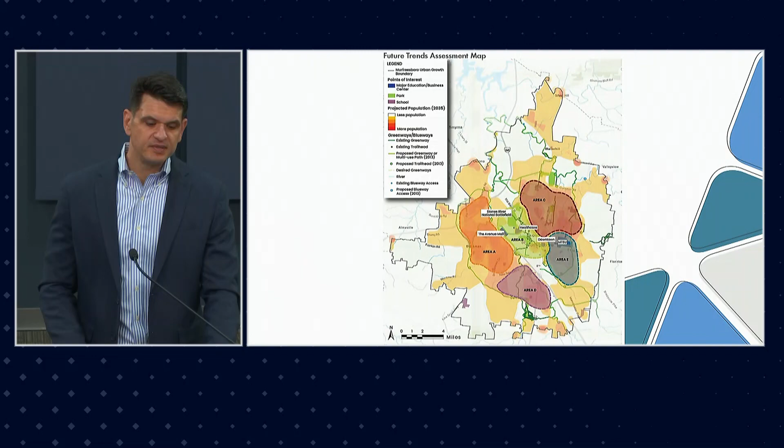So we took stock of existing conditions. We said, okay, this is what we want the plan to do, and then our next step was to take a look into the future and see where we're going and how we can make recommendations to support that. And that's what this map shows.

It's sort of a summary map. We divided the city up into the different areas that you can see there, and we looked at where the important things we want to connect are, parks and schools, but we also wanted to look at where population is growing. We want to get ahead of that and maybe start to build out a greenway system around that to help complement that growth. That was one of the important things we did with this map.

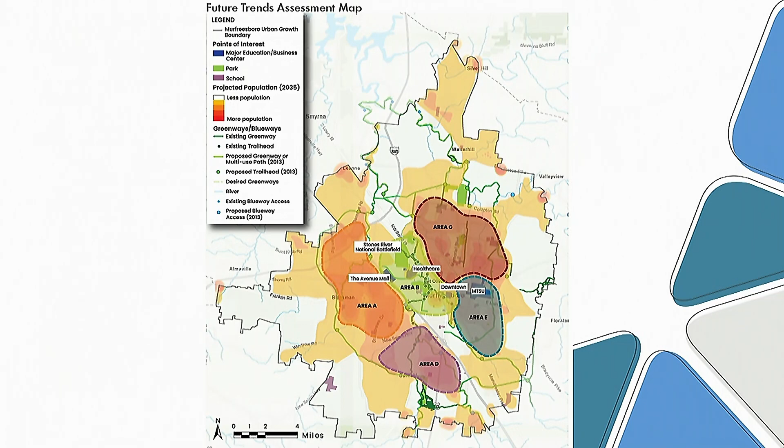And then we sort of played connect the dots, if you will, and started to draw connections. So what are some areas within each of those areas that we need to connect? And then how can we better connect those areas to each other? So you see a couple of different colored lines there. That reddish darker color are new connections, and then the yellow are some existing connections.

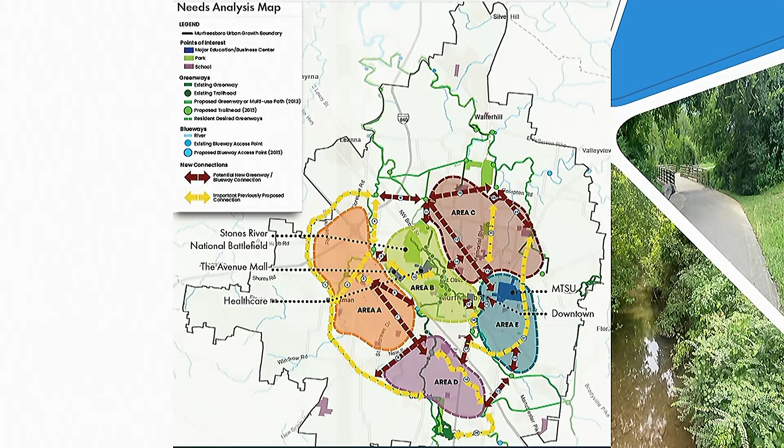So those are things that have already been proposed either in the previous plan or from the community, and we're simply calling that out and saying, yeah, those are things that you've already suggested, and they're still valid. And then the darker ones are some of the new connections that we've seen from changes, and here are some of the new connections that we think you should make.

We also asked the public to tell us, and so that's what this map is. It's called a wiki map, and it was online, and people could draw lines on the map online to tell us where they wanted to go. And you see there's a lot of overlap between the map we just showed you and this map, and that was just simply confirming some of the areas that people told us they wanted to go. We needed to make sure to make those connections.

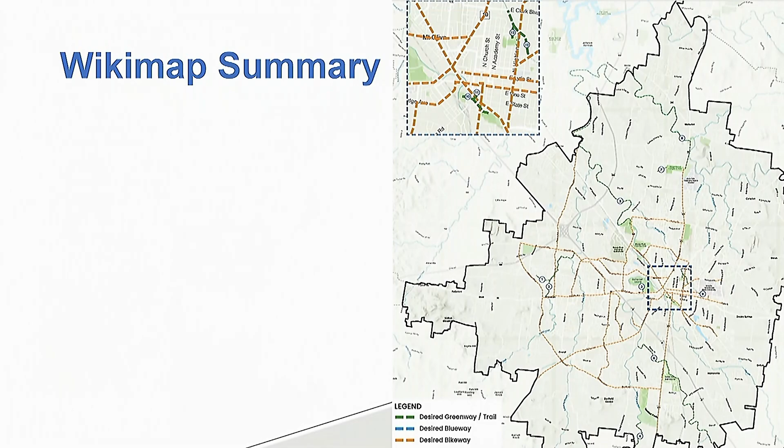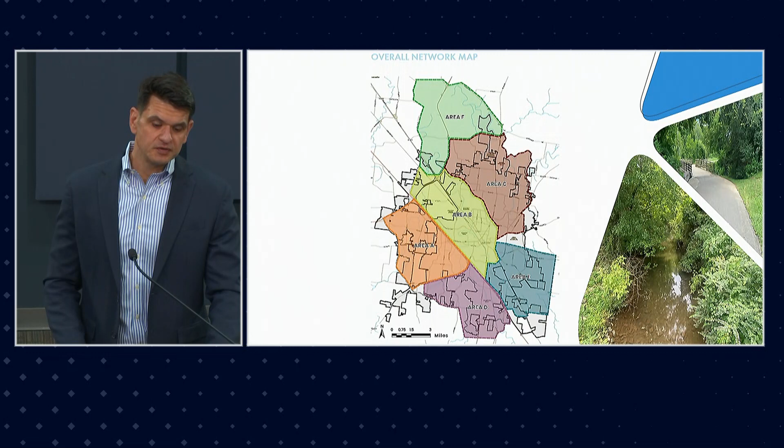So this is a little more refined version of that map that I just showed you, and this is what we built our plan around. So we identified 6 areas around the city, and within each area, we developed recommendations. I'm not going to go through every project, so don't worry. I think there are a total of 25 recommendations that are spread all throughout the city.

This is Area A, so it's just on the other side of where we are right now, on the other side of the interstate. And it's one of the faster growing areas in the city. And you can see that the recommendations generally would fall into, I guess you could say, 3 different categories.

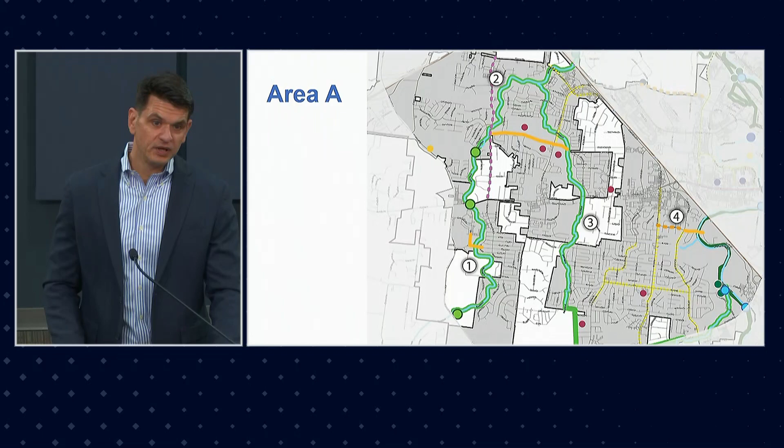One type of recommendation would be along an existing river that you can see there. So we call those blueways. They run along the river. Others run parallel to existing facilities, so existing streets, and those are typically in the form of a side path or side trail. And then others are new connections where we find either an abandoned right-of-way easement or something else that we could design a trail connection along.

And then the facilities, depending on how much right-of-way we have and where it's located, it could be sort of a standalone facility, or it could be more built alongside an existing road. It really sort of depended. But we had to go into each one and sort of make a judgment call.

So that map that I showed you earlier that had all the arrows on the map, this map tries to put those arrows into practice by identifying feasible connections within each area to make that happen. So this is Area A. The numbers on the map correspond to specific projects, so you'll see a table of projects in your report, and they provide descriptions on what each one of those are and how much each one we think will cost. And we'll show you that table in just a minute.

So this includes where we are right now in downtown, and you've got a lot of your existing greenway and trail facilities here already. So in this area, we focused more on making those connections, so connecting new areas to those existing facilities. This is Area C, a little bit north of there.

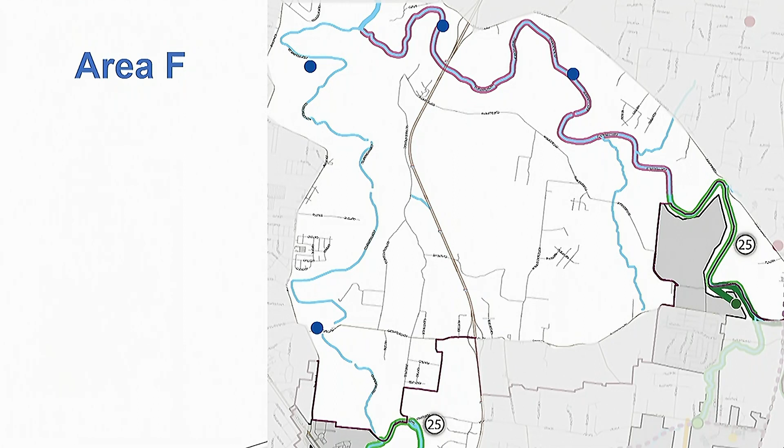This is Area E, down by MTSU and south of there, and then Area F. Each one had its own specific set of recommendations, and each has a description of what it is, what it's connecting, where it's going from, where it's going to, and what the facility type is.

So we developed the recommendations, and back in the fall we were here in the lobby and had a public meeting, asking people to give us their thoughts and feedback on those trails. In a lot of cases, people said, yes, that's exactly what we want, good job. This is what's most important to us, or hey, have you thought about making this connection?

So we made a few tweaks based on what we heard from the public. The other thing we tried to do — it probably won't surprise you that the city does not have unlimited funds. So we've got to prioritize our projects, because it's going to take a while to get them funded, designed, and built. We have to figure out what projects we want to pursue first.

So the way that we did it is we used a very data-driven approach to identify the trails that provided the most value to the community.

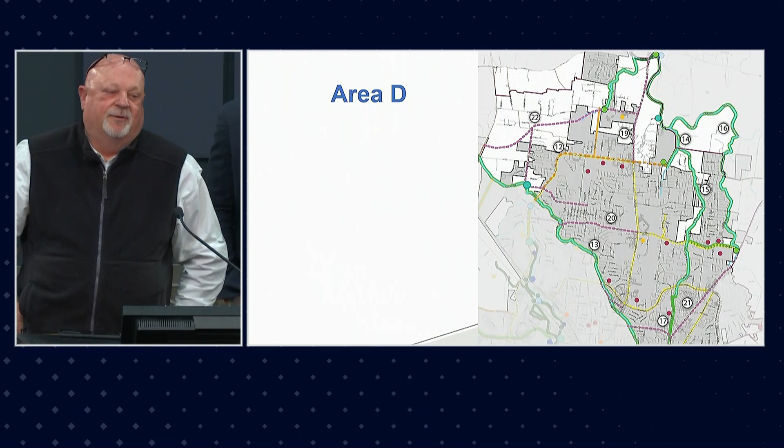Something we talk about with these plans is, when we vote to approve these plans, it's plans in principle, what we think would work, right? So we're not committing the city to funding anything, it's just what the plan would look like. And what we've discussed throughout this process is that opportunity a lot of times supersedes prioritization when it comes to these charts. We don't have to go down by that list, but it might be a funding mechanism that we can actually implement a section that might not be high on our priority list, but serves us best long-term.

Any other questions? I have one more quick thing. I think it is very important, as you stressed, to have a plan as we go forward and try to get funding from the state and federal governments, because that's exactly what they look for. So this hopefully will help us make those applications.

When we look at funding, there's lots of opportunities for a greenway. Our greenways, if you stretch it out, it's a linear park, and it's the most popular amenity that we have, the most used. So we're constantly looking at ways to expand it and increase opportunity. I think with the help of Kent, who's been doing this for a long time with us, looking for opportunity, and still the advocacy of former Congressman Bart Gordon looking for opportunities, it's still a funding mechanism. So this type of tool helps us get those implemented and funded in unique ways, and helps us have a really unique greenway system in Murfreesboro.

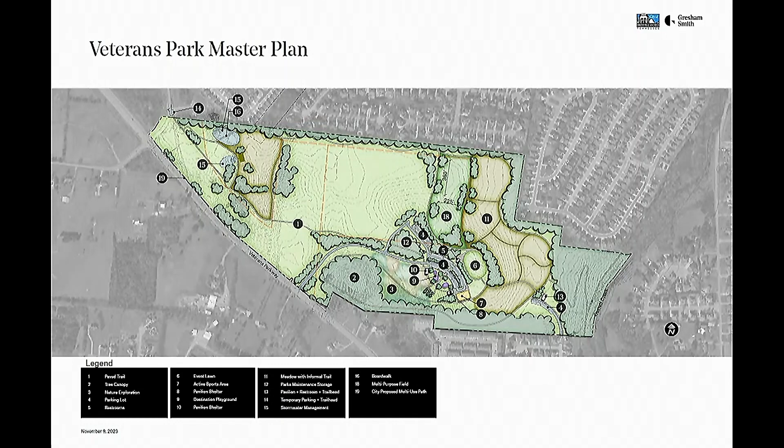We are finalizing right now our cost estimate, updating from the master planning effort, taking into consideration changes made during schematic design and some of the detailed development that came into it. We feel like we're right on target for where we were at master plan, so that's good news. And again, kudos to Nate and his team for not adding too much stuff in that would get us out of whack and unable to deliver on what we promised.

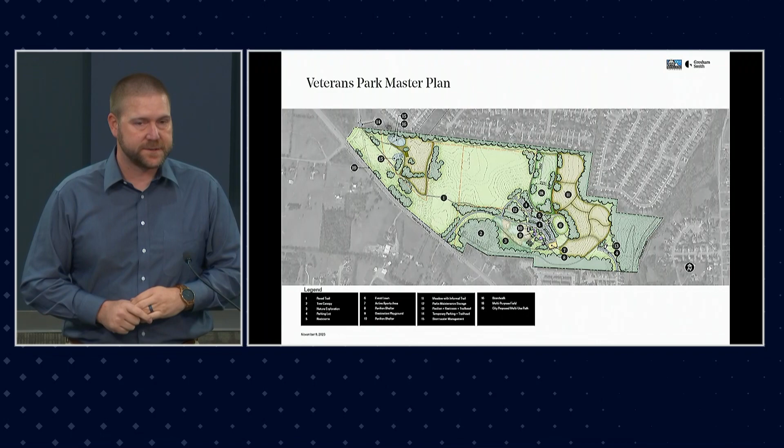So what I want to do now is walk through some of the plans. This is just a few selections from the set that was delivered to the city, and we'll start to see some of the detail that has been developed. This is an overall exhibit, just orienting you to where things are within the park. You can see the dense area, what we consider the heart of the park, where you'll see event lawn space, the destination playground, parking—a lot of those components show up there. So this is just your high-level overview.

Starting at our park entrance, trying to think about what the arrival sequence feels like when you come to the park—what do you see first, what's that design aesthetic, the language we want to establish as soon as we arrive. The intent for this park is to be more passive, right? We're trying to get a little bit more back to nature, give people a respite, get away from the city, get with nature. So we want to implement that as soon as you come into the park.

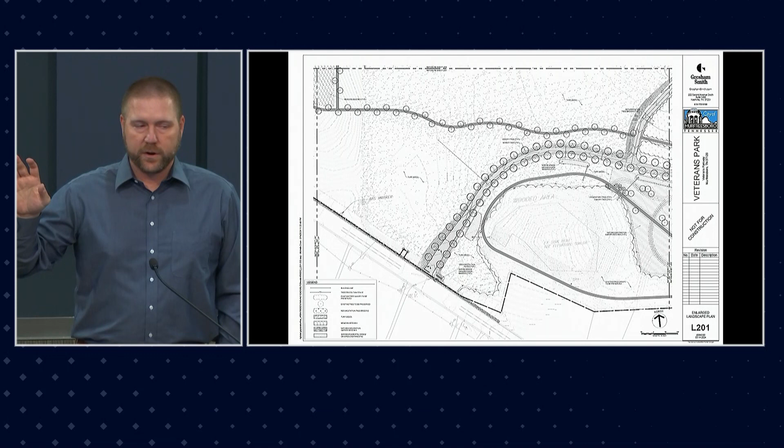So we're continuing to revise and modify this. How do we position sidewalks? How far away from the travel path should it be so that you get that more passive, recreational feel, a little more pastoral in the way it's designed. So this is where you see the entrance road with street trees lining it, and some of our trail network showing up here.

Part of the scope involved here is a multi-use path along Veterans Parkway. We have a work session scheduled tomorrow with Nate and his team to really flesh out more of these details and understand how we want that multi-use path along Veterans to look. So you'll see it here depicted right up on the right-of-way. We're not sure that's the right way to do it—we're certainly open to a bit more undulation, curvilinear layouts, to make it more passive and recreational in nature. Some of that will be determined by topography through there and the cost of implementation. So we're trying to balance those things as best we can to deliver a positive project here.

So as we pull further into the park, now we've arrived at what we consider the heart of the park.

Right here in the middle, this is what is really kind of driving the activity in this space on a day-to-day basis.

This is where your destination playground shows up, and the intent is to break this space into 2 or 3 different levels of play that accommodate different ages and abilities, giving everybody an opportunity to play in their own space, but also integrate and mingle to make that inclusive experience as positive as we can.

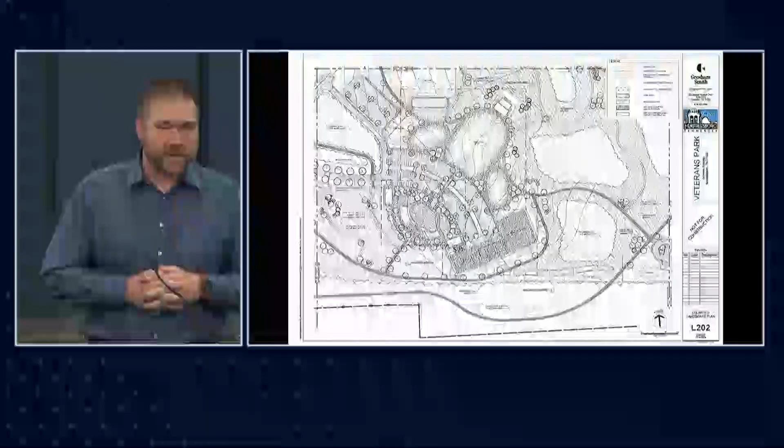We're looking at synthetic turf at this point. We've worked with Landscape Structures to begin to work through some concept equipment layouts. We have some of that information, and it has informed our cost estimate at SD, but it's not pinned down enough to share it with you guys yet.

So that's coming in the future with more of a description of what these features will be and how they can be utilized. That's a big component here, and I know it's a big driver for staff, so we're really trying to make sure that we nail that piece.

Moving on around, you see some active sport courts. Right now, we're showing that as a mixture of pickleball and tennis. It could be a number of different things as we work through and refine that program. What are the real community needs? Do you need tennis courts, or do you need 800 pickleball courts, or whatever it is? So we want to make sure that we talk through that and nail it on this first pass.

We also want to set up a framework that would allow this to grow and expand over time if it needs to. So we're also considering whether or not this location in the park is the right spot, or do we need to move it out, give it a little more space so it could expand if we need to in the future.

The ask on this was to provide 4 courts that would be covered, pickleball courts that are going to be covered and people can use in all weather conditions. Certainly they'll be lit to a safety level.

The intent is not to have this park active after hours necessarily, but there are times of the year that at 5 o'clock it gets pretty dark, and we want people to be able to get out there and still have some activity, activate the space. So they will be covered, or some will be covered, some will be lit.

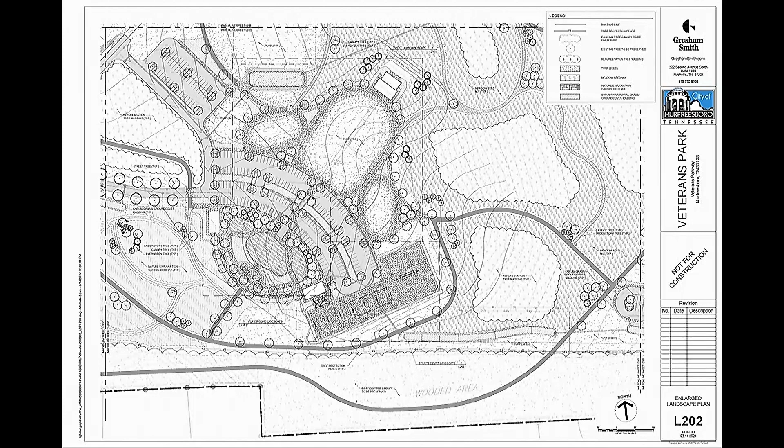You're also going to start to see pavilions showing up through here, and that's probably one of the bigger changes in design direction from master plan to where we are now. You'll see some more detailing on that later. So just know that those are pavilions for right now, and we'll talk more about the detailing and design of those in just a minute.

This is pushing off to the east side of the park, and it's a timely update from Kimley Horn and their team to provide that trails, the Greenway and Blueway trails. So what you see here is a future connection down to the creek that would tie into that planning work that they've been doing, along with what's happening out along Veterans Parkway.

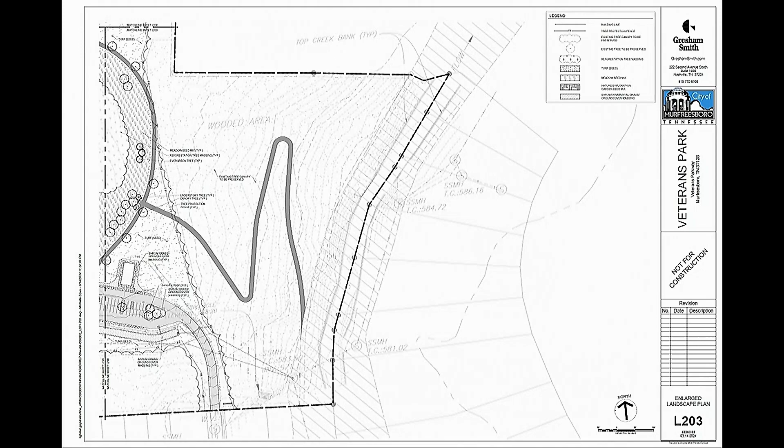I'll back out one, let me go all the way back here, actually. What I didn't point out at this stage is the incorporation of a 2.5K trail loop system. So the intent would be that we provide a 2.5K loop that we can run 2 laps, and you've got a 5K event pretty easily programmed within the park.

It's also easier for people to come out and train and be active. If you've got a measurable distance that you know what you're running, it's a lot easier to kind of get out there and draw people in.

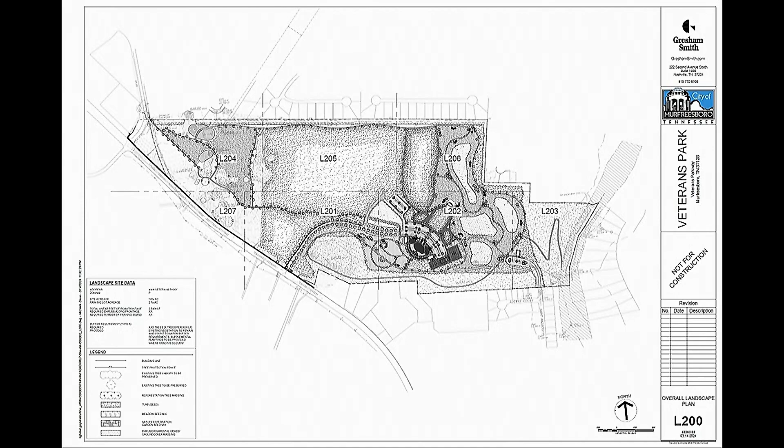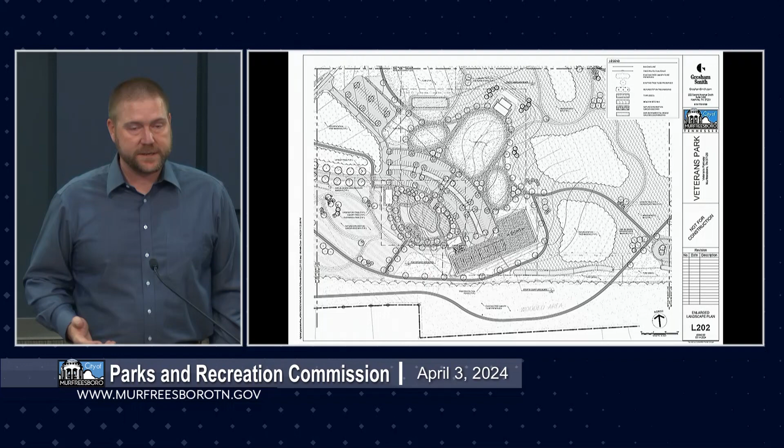So I think the point there is that along with the Trails and Greenways master plan that you guys have, we're adding a substantial length of trail as part of this project just inside of the park. So giving people a destination to get to, extending that experience that they have, and then starting to intermingle with natural meadowland restoration, some reforestation that we expect to happen on the property. So that's the connection back to nature.

Everything's starting to work together on this one. This is another deviation from the master plan where we start to look at what do we want an event lawn to be in this park. We don't really know yet, so we don't have it programmed. You don't know what event is coming, how big a festival might be. So the best thing we can do now is provide as much flexibility as we can for the city to utilize this space as effectively as possible for the community.

So we expanded the event lawn, provided a bigger space. We're expanding the maintenance pavilion there. There's also a significant electrical component that could support a stage if we need one. If you want to have a movie on the lawn, this is great for that. If you want a small music festival, you can accommodate that. So you'll see in the plans, we're trying to provide a framework of flexibility for you guys to expand into and grow with over time.

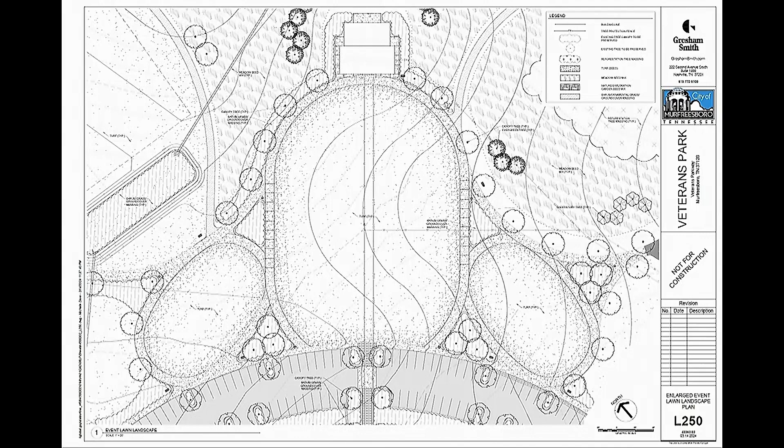A little bit closer, an enlargement of the playground area where you see we're flanked by two pavilions, each of which has a restroom facility in it to accommodate easy use for people that are at the playground.

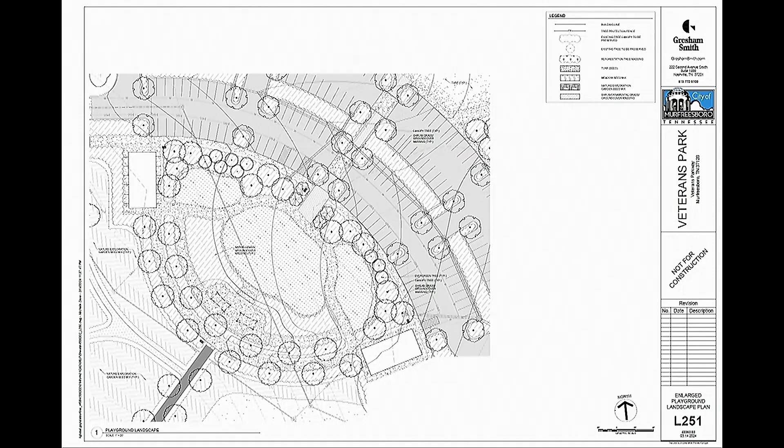We're trying to also work with topography as best we can. One really exciting way to stretch your dollar in the playground space is to use the ground plane to your advantage—give kids hills to climb on. I've got two young children myself, and that's the first place they're going. They're going to get on the hill and roll down it and try to get as dirty as they can. So we're trying to provide those opportunities throughout the playground. The more we can do there, the less money we have to spend on a slide or swings or anything like that. So we're trying to find creative ways to stretch our dollars just a little bit.

And then the next piece that I think is really exciting about this project, and it sets the tone for the aesthetic and design intent of the space, are the pavilions. So this pavilion plan that you see here, we have three of these—two at the heart of the park and one off to the east that's a little more remote, with a future connection down to the Blueway.

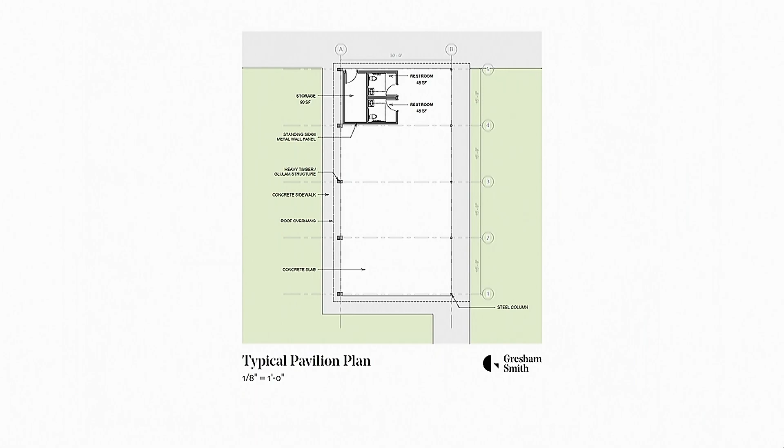We started to play with more of the natural earth tones. We want woods and metals, trying to provide something that is timeless without being too classic, allowing this park to push the envelope on the look and feel of how you guys have traditionally done covered spaces in your parks. We're excited about the look. I know that Nate and his team were all in support of it, and this is reflected in the cost estimate that we are working through final revisions on right now.

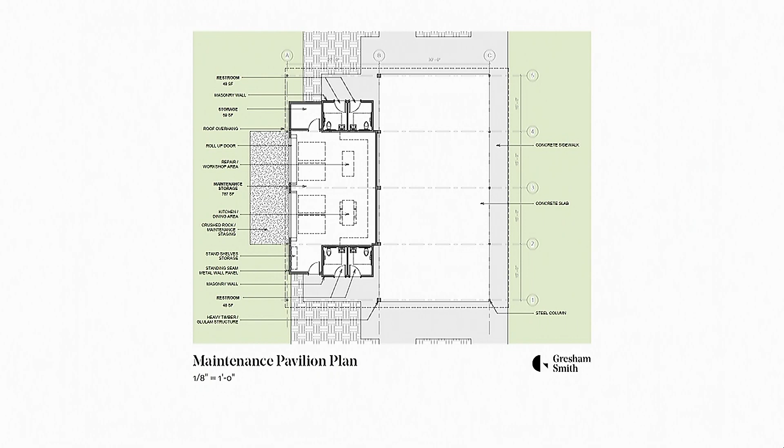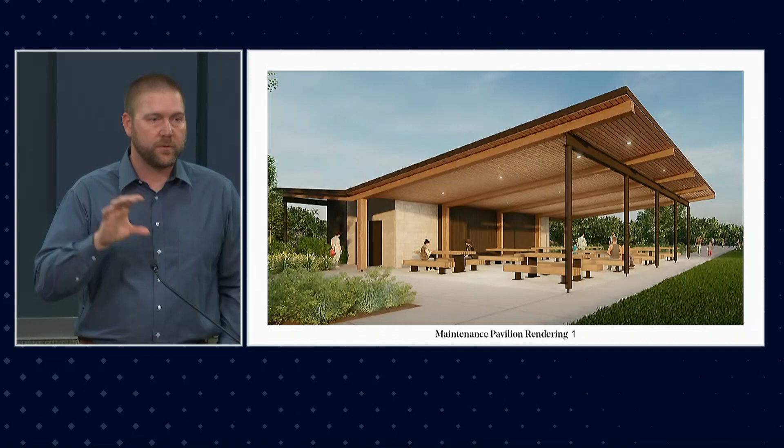So this is what that pavilion starts to look like. It takes that monoplane slope and adds a little wing on the back to provide covered space for the maintenance crew as they need it. Still have restrooms on both ends. This is the pavilion that addresses your event lawn—the high side looks out across the event lawn, so think of this as your backdrop for any event going on. If you need a covered grandstand, you've got it built in right here. If we need significant power to run something out there, it's built into this space. So everything has been thought through and integrated into this maintenance pavilion.

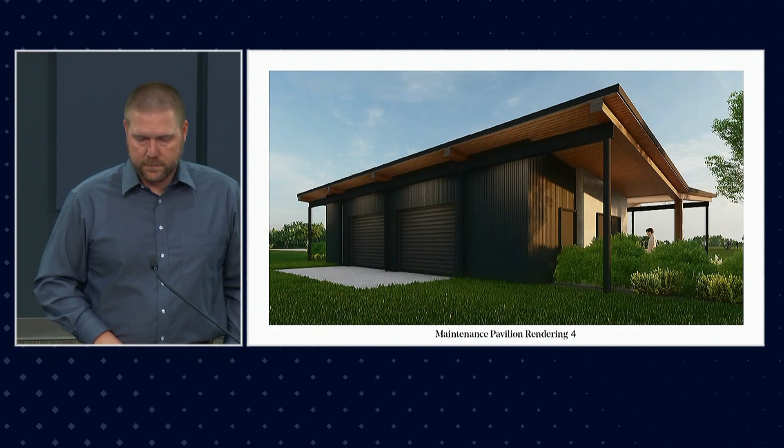The view—we have a few perspectives of this one. Backside for the maintenance access, a couple of roll-up doors there. And again, that's the location for where that pavilion would be planned.

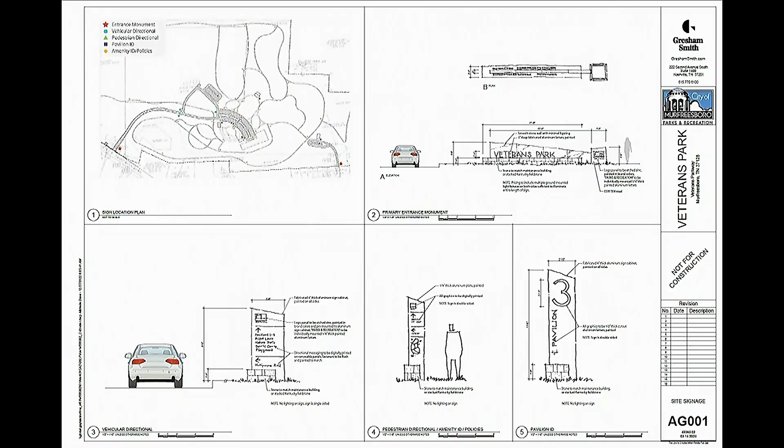That's the end of what I have to talk through. Our next steps: we have a work session tomorrow with Nate and his team that kicks off our real effort on design development. We've got about 8 weeks in our schedule for that process. We'll revise the cost estimate again based on any changes between now and the end of design development, then sprint through construction documents to get implementable, buildable plans about 8 weeks after that. So we're about 4 months away from the end of our design process. I'll stop talking and take any questions.

From a staff level, what he said about the 8 weeks—we're 8 weeks away from having a cost for this build out. We took it to council and showed different options for how they wanted us to pursue this park, and they said pursue everything and check back with the cost. So in a couple months we'll be able to take that back to the council as a whole and see which way they want to pursue. They're keeping us updated in the meantime about what they think our cost is, and we were really close at the very beginning, so we're excited at a staff level. We'll take that back and see how council would like to proceed. But while Trey's here, any questions specific about design, we'd love to answer those, or from a staff level as well.